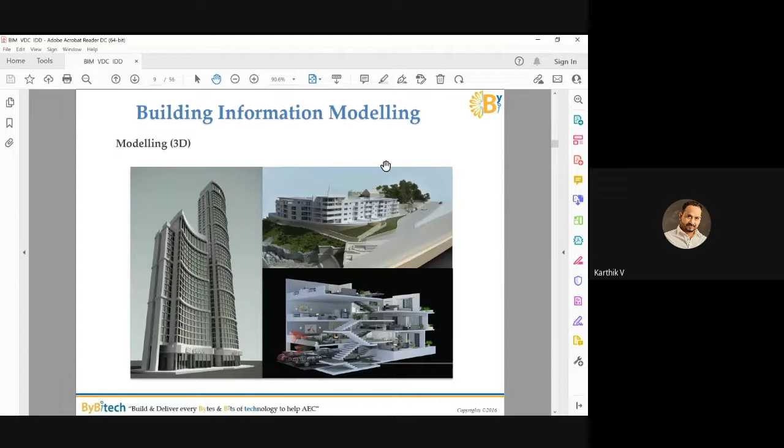So you can add information to each and every object. Whatever information you want, you can add it. You can add the cost, the time, the facility management details, even the purchase details, when you purchase it, when you fix it, whatever data you want, with the information, building information modeling. If you Google building information modeling, you might find millions of definitions.

So the simple one first, everyone please understand, as long as you are all young teachers, you should not teach the wrong thing to the students. I heard in a lot of places, even in India, last time in Singapore also, people mislead what BIM is. People say BIM is a software, you buy it from the shop. No, BIM is a process. BIM is a new technology, workflow, process.

It's not a software. Last time, when we migrated from manual drafting to electronic, we used AutoCAD, MicroStation, some tools like that. So now people understand it the same way: if I buy some 3D modeling software, information modeling, I know BIM. So people misunderstand that. So remember, building information modeling is a new technology.

You can make it AECO: architectural, engineering, construction, and operation. Now we are bringing operation inside also. So AECO: project, design, engineer, build, and manage, which is operation, for greater return on investment. So just imagine, before I go into more details, what is the return on investment?

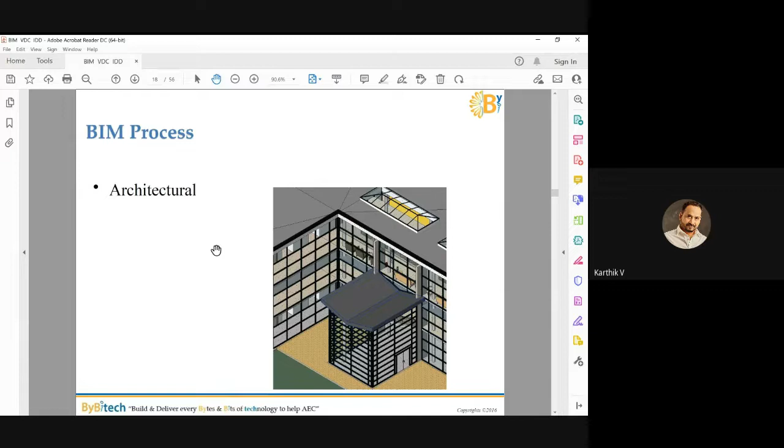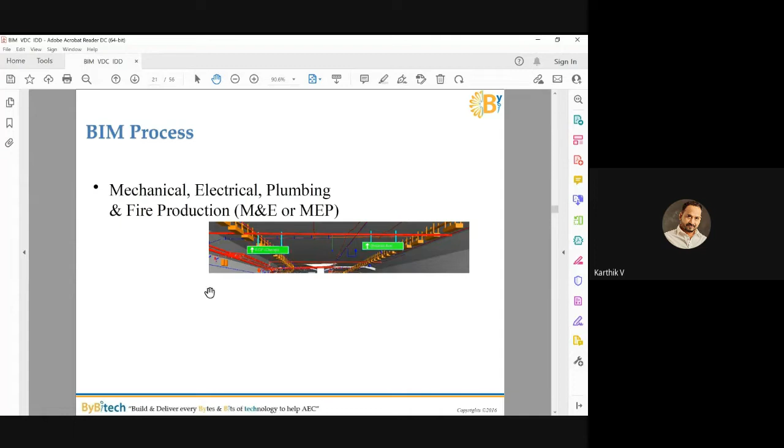So first we do the architectural. Then after I finish my architectural, I do the structural. Once I finish the structural model, I do the civil model: road or whatever, rail, tunnel. Then I do the MEP model. You can see the civil model, we just show the road, tunnel. Then the MEP model, we just cut and show only the MEP. So in the building: mechanical, electrical, plumbing, fire protection. Okay, they call it the M&E or MEP.

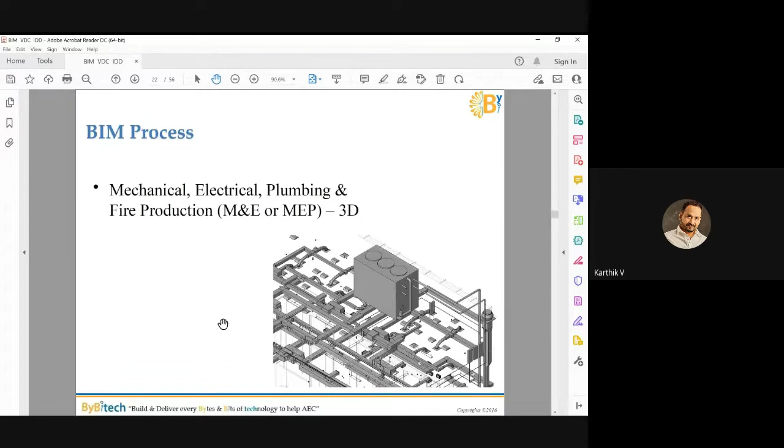Then you can see here, this is the 3D model. So after that, we will come out with the 2D drawings also from the model. So these are the sections. Normally, how long does it take to draw this section? Example, this is my plan. I want to cut a section here. Then I draw this section like this. How many days does it take to draw? It might be more than half a day to 2 days, depending on the draftsman or modeler.

But in this kind of software, your model is already there, which means your drawing is also there. You just cut, you just draw a line, then it will show you a section over there. So whatever you can see on the screen, mechanical, electrical, plumbing and fire protection, 2D, okay? Whatever you can see on the screen, this is just a 2 to 5 minute job.

You may need to spend some more time to add the annotations, okay? Take note of that. Annotations will take some time. If you want to add the tags and other things, it may take some time, okay? But just cut the section, immediately you can see the section. In a matter of a few seconds, the section will come out. So it's really fast for the 2D. Then I can assign the same thing in my 3D also.

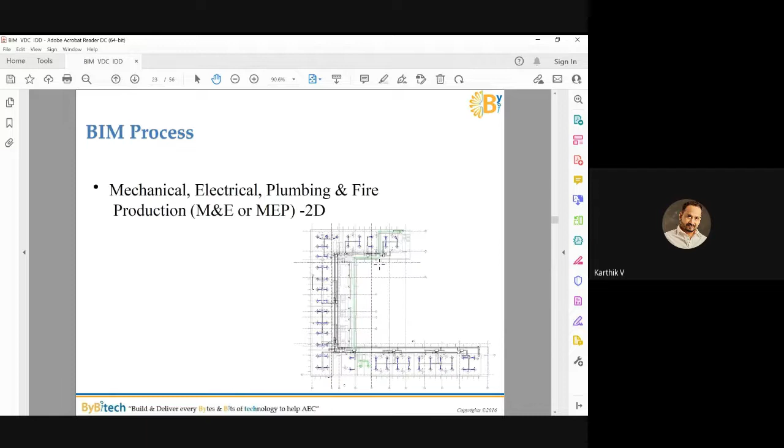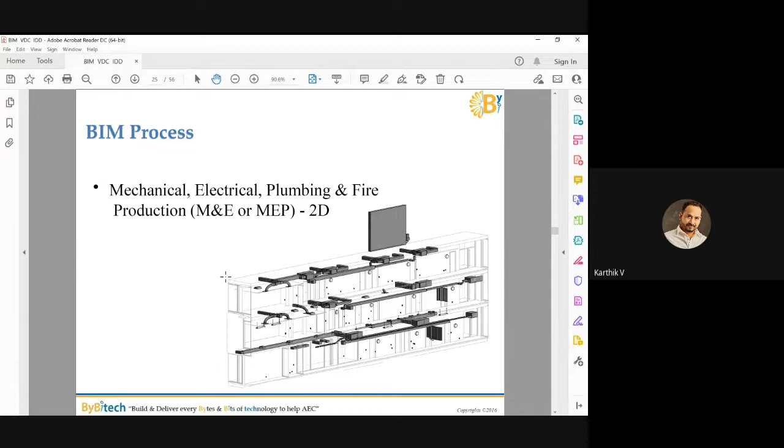Look at here. I have a plan. Then I just cut a section here. This is my section. Sometimes people misunderstand even the section. So then I show it in 3D, some isometric view. So in one drawing, now I have a plan, section and 3D.

Okay. Now the level of detail. We need to worry about the level of detail. That is really important. A lot of people misunderstand it. When you talk about BIM, you talk about the model, hardware, software, level of detail and standards. These are all important. So now we are talking about level of detail, LOD. Different countries have different standards. In Singapore, we are not using any numbers, we are using the stages: concept design, schematic design, detailed design, construction, as-built and facility management.

So we have all the stages. So how is the model going to be? When I'm just starting the design, how detailed should my model be? A lot of people sit down day and night for 3 months. They come out with a very perfect model when they are doing concept design. I just want to share with you one school project in Singapore. My foreign client is an American client. They came out with an excellent model for the concept. Then we shared that with our client.

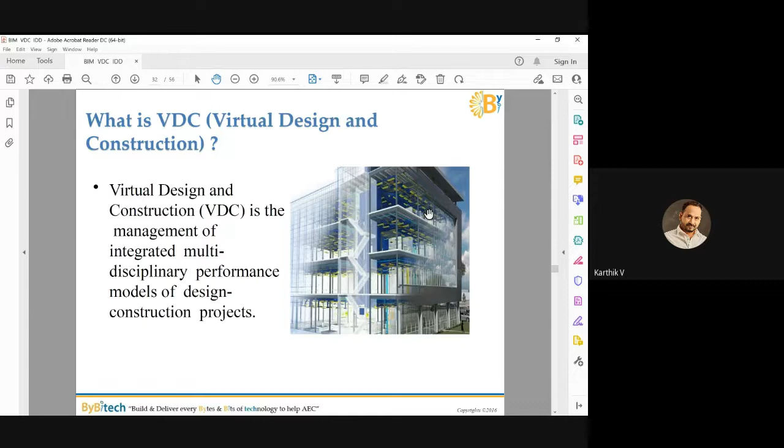So BIM, as I mentioned, is how you are going to create the 3D model, using your hardware, software, trainings, also your standard level of detail. So these are all BIM. Is that clear? What is VDC? So VDC here is how you are going to utilize the 3D model. Is it clear? How you are going to create the 3D model is BIM. How you are going to utilize the 3D model is VDC.

Okay. So you can see VDC utilizing the 3D model. Then you can see the organization brings builders and designers together in a team. So you can see the BIM 3D.

Sorry, can you mute, somebody? Mute your mic. Okay.

Thanks. So we discussed 2D, 3D, 4D, 5D, 6D, and 7D. So now I'm going to talk about building the BIM model and analyzing the best option, which is 7D. So once I finish my 3D, straight away I go to 7D analysis. Then if I go to VDC, I can build it cheaper, faster, and smarter.

Okay. Also, you can reduce the project risk and increase the safety. So for example, we are going to discuss utilizing the 3D model, which is VDC. Okay. So BIM is how you develop the 3D model. VDC is how you are going to utilize your 3D model. So from the 3D, as I mentioned, straight away I go to 7D.

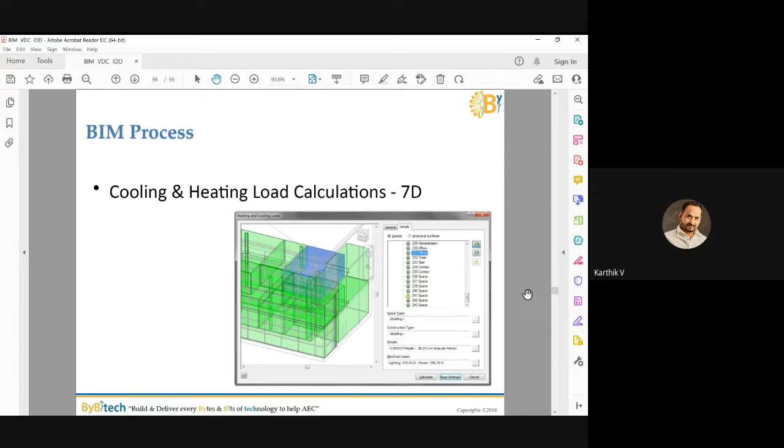So I'll just show one example for the MEP part. I can use the 3D model, then I create the spaces, then I do the cooling and heating load calculation from the 3D model. Just an example only, okay? So using some software, I can do that calculation, then I export to another tool, then I can continue the calculation.

So another part of 4D is clash detection. This is really important. Okay, I keep my chat box open. I want to check with you. What is the difference between clash detection and BIM coordination? Anyone can say? Clash detection and BIM coordination. A lot of people are confused by these two terms.

Okay, in clash detection, you are going to find the clash. In BIM coordination, you are going to solve the clash. A lot of people misunderstand. When you have a 3D model, it's really easy. You can bring in your structure model, you can bring in your duct model, then you can ask the software to find the clash, which is clash detection. So the software will find the clashes, then it will list them down. In a matter of a few seconds, you will get the clash report.

That is not enough. Okay. After that, you have to call your engineers, structural and MEP engineers. Then you should run the coordination meeting. That is called solving the clash. Is that clear? Okay, so clash detection and BIM coordination, we need to do both.

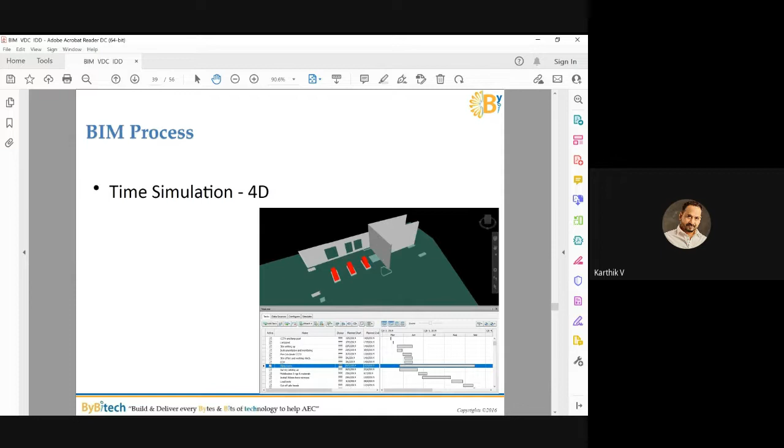I come out with my project. Then I link it here. Then I bring in my 3D model. I just auto link it. Now I have a simulation. So people can see a few things clearly. First one, the objects are flying. Hey, this one is the third floor. How come the third floor comes first? It should be the first floor. Visually, you can see your schedule. That is really important. Then with the 4D simulation, you can check whether the project is ahead or behind.

Excuse me, can you mute? Everyone, please. I don't know whether it's affecting others or not. Really sorry. Okay. Thank you.

Okay, you can see the simulation. Remember, you can visualize the project, whether your project is ahead or behind.

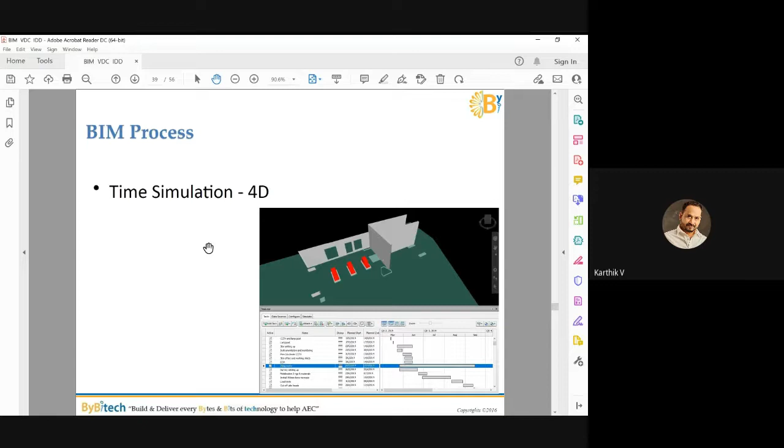Okay. So, the 4D. Anyway, the 4D simulation, I hope you can see the slides now. The 4D simulation will help you to identify the project schedule, whether you are going fast or slow. Then the 5D is cost estimation.

Anybody can help me to let them know? I think Priya, Priya, yes, Naren. Can you ask her to mute?

Thank you. Sir, please continue. In my opinion, Priya has unmuted herself.

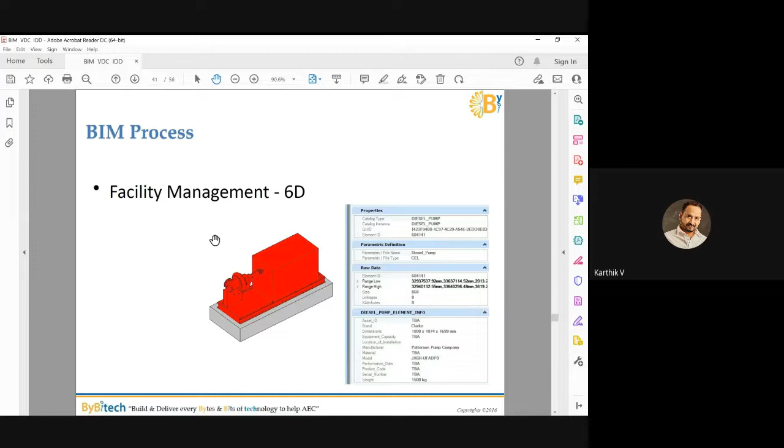That is facility management work. So facility management is key. In future, we should have this kind of electronically controlled system, last time we called it CAFM, Computer Aided Facility Management. Now people are saying BIM FM, so now we are talking about BIM FM.

So the stages in VDC are also design, build and operation. First you should understand and define the things and measure the quantity, then plan and analyze, improve and control. So this is the approach, okay?

So the model is BIM. How am I going to utilize the model, then how am I going to use it for my construction, quantity takeoff, simulation, everything - that is the VDC approach. I am going to plan and analyze, then improve and control.

So the last part, we are going into IDD. So BIM, how we are going to create the 3D model using the hardware, software, standard and level of detail. Then how I am going to utilize the 3D model, which is 3D, 4D, 5D, 6D, 7D. And now we are talking about IDD, Integrated Digital Delivery.

The important thing, there is a slogan in Singapore: build twice. First virtual, then physical. This is the method we are following. We first make it virtual, then use it for coordination, quantity takeoff, everything.

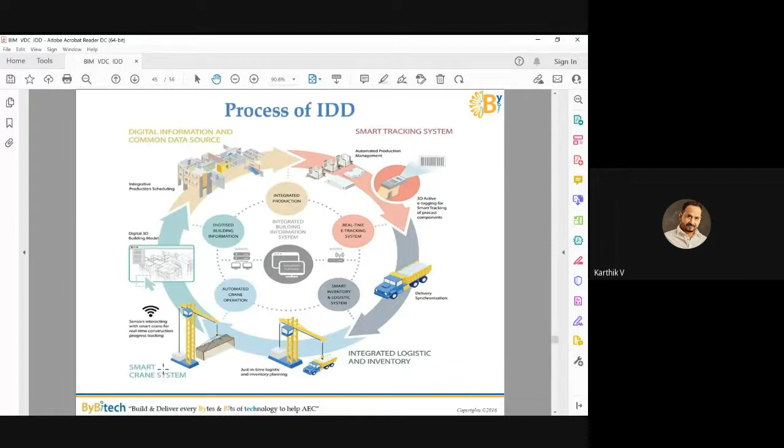Then they will ask the question. Meaning to say, they can track where people are. If there is a fire, immediately they can check how many people are inside, how many people can evacuate from which floor - easily they can identify because of the RFID smart cards. So this one is design for manufacturing and assembly, DFMA.

So you can see the final version of the PPVC module, the first PPVC module, meaning everything is built outside, the PPVC, prefabricated prefinished volumetric construction. You can see them hoisting it, installing it, then waterproofing and sealant fixing, then the linkway bridge comes out of the building.

So now in Singapore we are planning this, even though it's a little expensive, we can save more. When we save more time, you can save more cost also.

This one is the PPVC which is concrete. This one is the mechanical one, plumbing, fire protection. You can see the duct, the cable tray, everything, they fix it. They just put it in the factory itself based on the dimension, then bring it to site, just fix it and do the connection only on site. Just imagine how fast the building can finish.

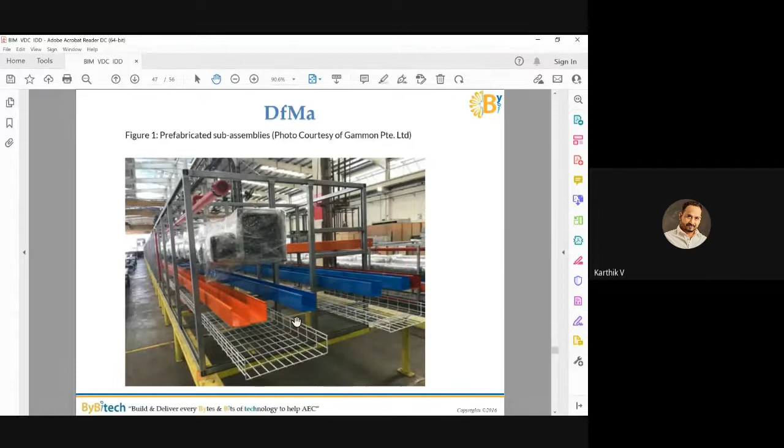This is for MEP. So the scope of IDD: first you go to design, the main thing is collaborative and coordinated design via BIM VDC tools.

Then when you go for DFMA, digital manufacturing and fabrication, it's offsite production, fabrication, and component management through automation and robotics.

Then the digital construction stage, they use it for assembly, integration, delivery, and installation of fabricated components on site.

The last one is digital asset delivery management. This covers verification and handover of the asset for operation and maintenance. So the last part is really important, we call it digital handover.

Nowadays owners don't like a lot of papers, boxes, warranty details, everything on paper. They say it's really difficult to key in for my facility team, and also we need to keep it for quite a long time. So they want everything digitally.

So when they click the model, for example the television brand, every detail is there, also the warranty, everything digitally, they want to hand over. So that's digital handover.